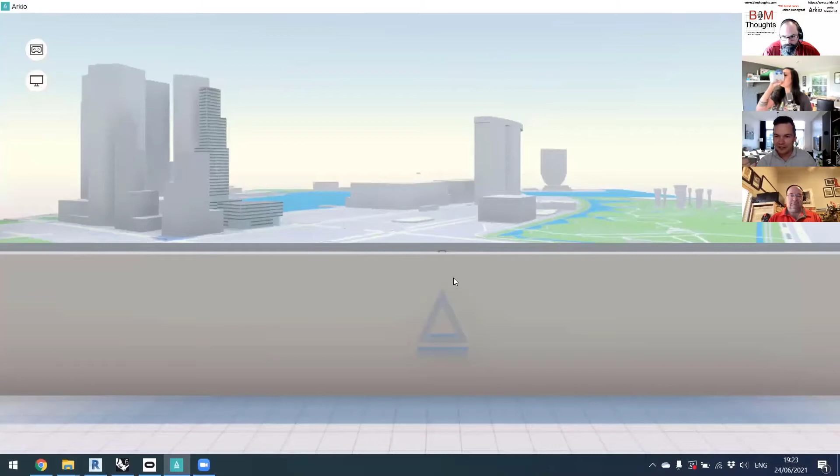Look at that, I can show a couple of things. We can also, I understood Carl, you got Arkio running on your end as well, right? I do have it, I don't know that I have it set up right now, but I do have it. Do I need to get it ready? Maybe at a later point you can just join in and we can show the fun collaborative things you can do.

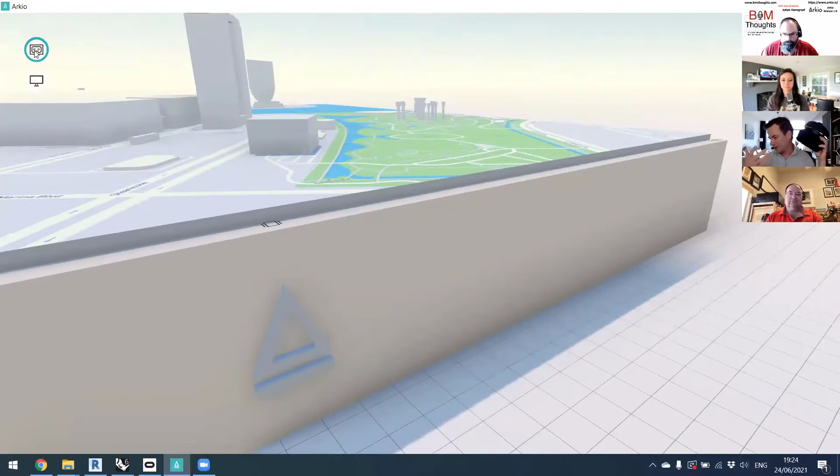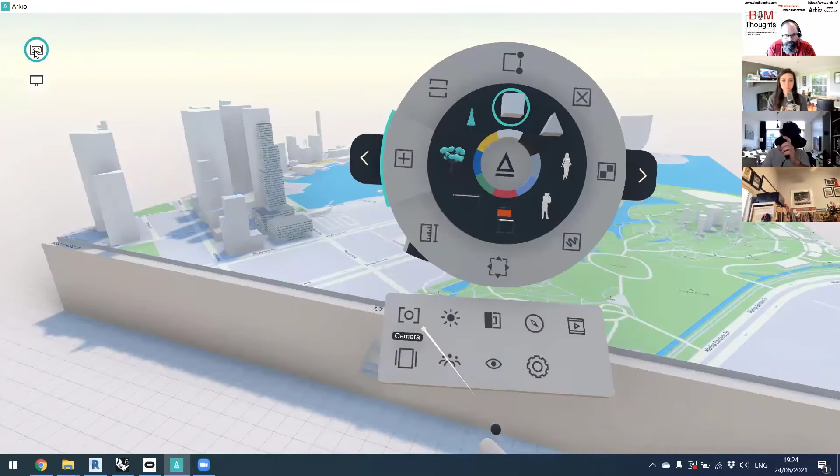The best way to show it is just going in there and showing you a bit how things work. So what you're seeing right here is the view I'm seeing in front of the table I'm standing at. I loaded a model of Singapore, but let me start from scratch, like I have here, a table where I can load any map. Let's go to the Empire State Building, for example.

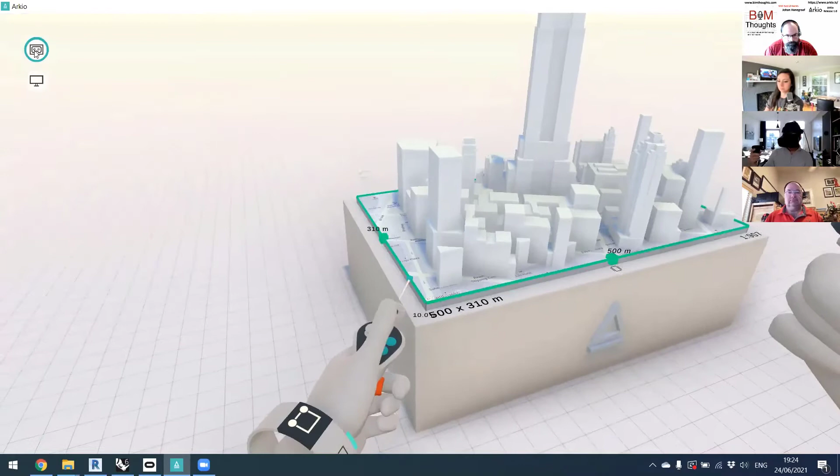And I turn on the 3D buildings. What that will do is take OpenStreetMap data, publicly accessible data, and we just load that on the table for users to work on. So that's the base that you start from.

You can load any address in the world as a city, and from there you would be able to—let's just bring up that menu again—erase some plots. Maybe there's going to be a new tower here, and in the erased plot I would be able to place some of the assets I have by default in Arkio, or some of the imported assets.

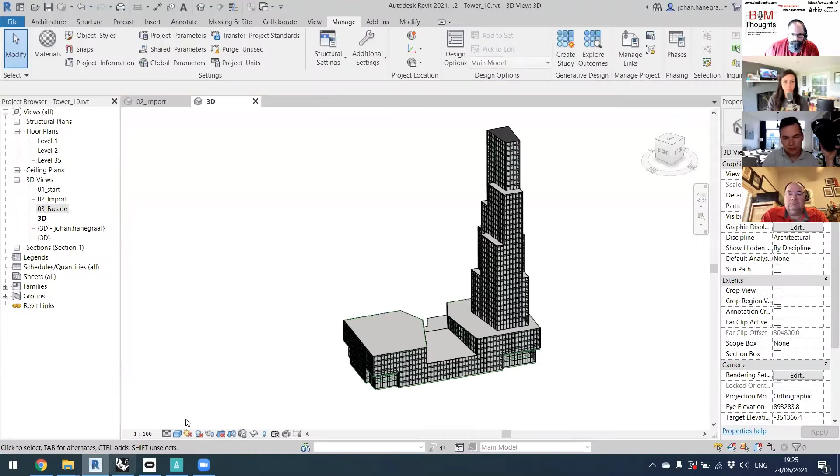The imported assets themselves, we have integrations with Autodesk Revit, Rhino, and SketchUp. It's pretty simple—after you install the Arkio version for Windows, you get these plugins in your software, and you can export the model from the 3D view you want. That will prepare the model for viewing on mobile devices, like the Oculus Quest, this portable headset, or iPads, or your Android phone, reducing the geometry so it can be loaded on smaller devices. It will load it to Arkio, and that will show in that import drawer I just showed.

So in here, I already have some models loaded. You see, I have a Rhino model over here, and currently my Tower 10 is updating again because I re-exported that one. Let's see, I have a twisty tower here—a Rhino twisty tower. I'm just going to put that thing in here. It's basically like a physical modeler. Once you bring things into Arkio, it becomes an object you can just pick up and interact with.

And the best part is that when you're making new geometry, you can draw on top of that model, and the geometry you make natively in Arkio is parametric and really easy to use and adjust using your hands. You see it's almost like the push-pull functionality in the massing tools in Revit or in FormIt. That makes it super easy for designers to just mass out some quick ideas.

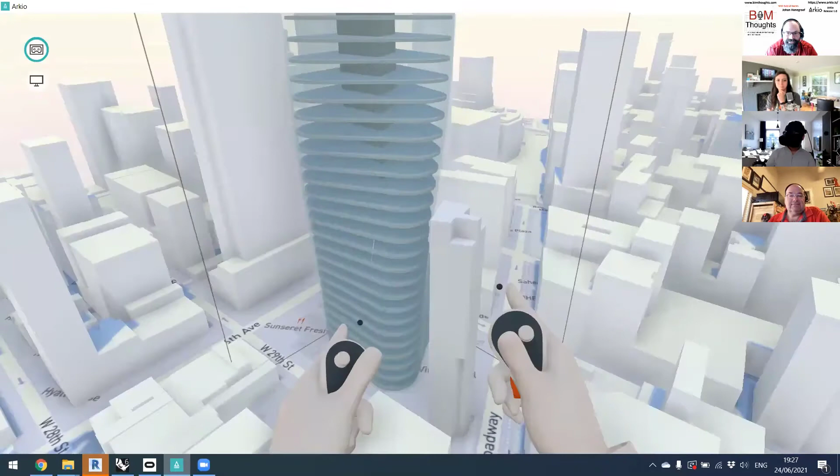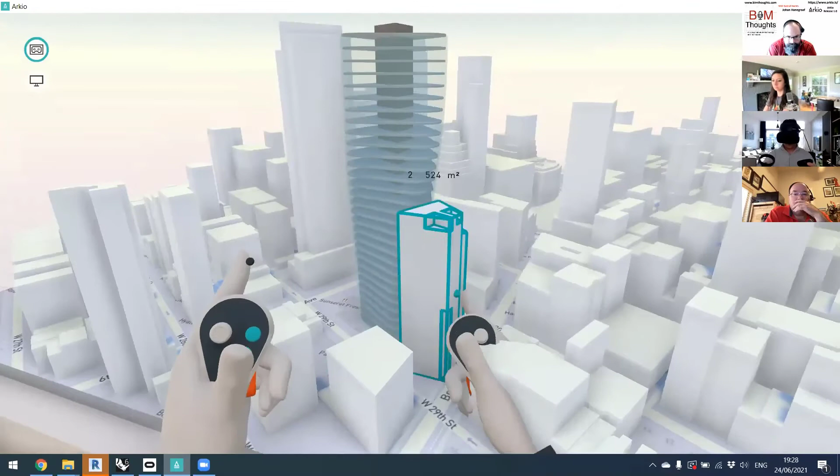Yep, and I'm just shaping something now using my hands and aligning it. The best part of VR is that I'm really seeing the model as it is—I'm at 1 to 500 scale. This is really the physical model in front of me right now, and I can interact with that model at this scale, or I can jump into the street at the 1-to-1 scale and see that model and adjust it from there as well.

The geometry created in Arkio, our smart geometry as I can call it, is fully adjustable, and I can keep editing it from this scale as well. You see me just stretching the tower down a bit, moving it like this, and I can jump back up and make further edits to the design like this.

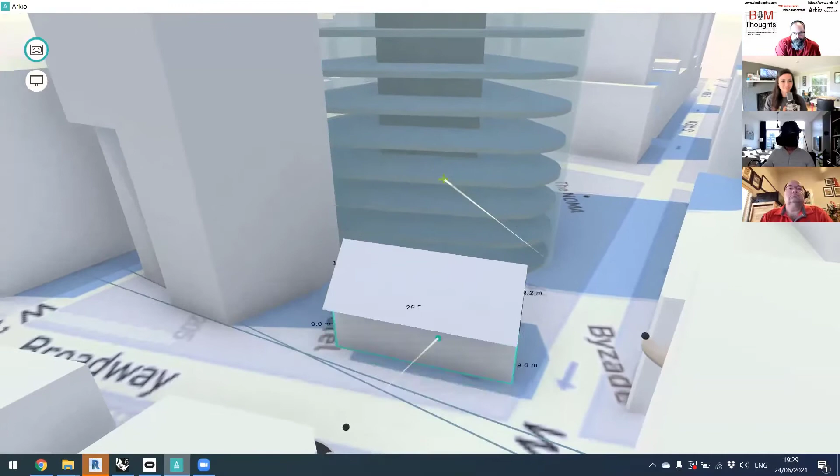Maybe I want to get rid of that one, just throw it away. There's a lot of things we put in there that are familiar with 3D parametric tools like Revit. So if you're familiar with Revit, you already see what's happening when you're stretching things together—you feel that they're snapping together, and once they snap together, it's making a parametric constraint. Currently this house isn't giving me the result I want, but let's make a cleaner scene so you guys can see.

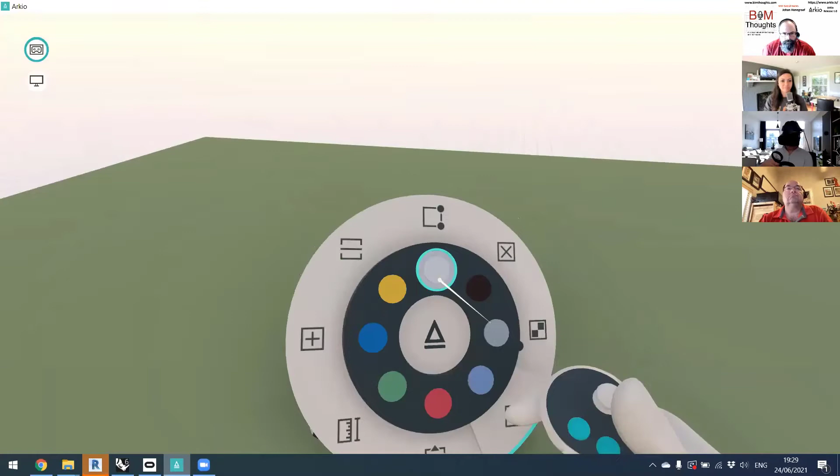So this is just an empty table. I'll just make a tiny house like this.

It literally looks like you're working at 10 speed. He's so speedy. It's amazing to watch. Yeah. Well, and it's funny as you're saying that—for those of you listening to the podcast, you definitely have to watch the video.

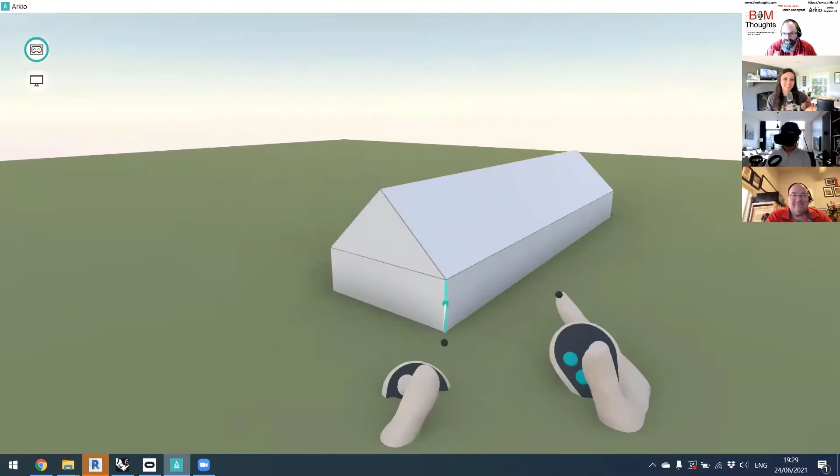But when you watch designers that have been using SketchUp for years, this is kind of how they iterate. But he's able to do that same speed, same time, live here inside of VR.

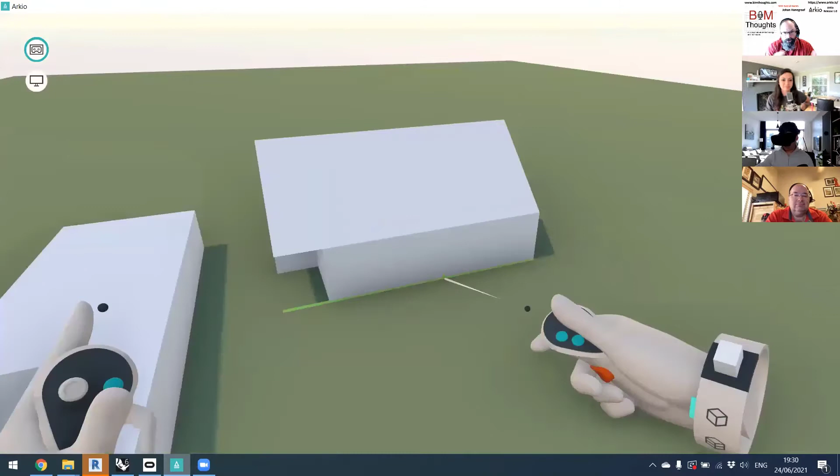For me, the earth-shattering thing was when he was walking through the demonstration in downtown Singapore, New York, or wherever he was, doing it in 1-to-500 scale, then instantly going down to real 1-to-1 scale and looking up at this 60-story tower, making adjustments, then going back to scale. That really would be a game changer for being able to do it right, because it looks like it's going to leave a shadow, it looks like it might do this, but when you're standing there looking up 60 stories, it definitely gives you a different perspective.

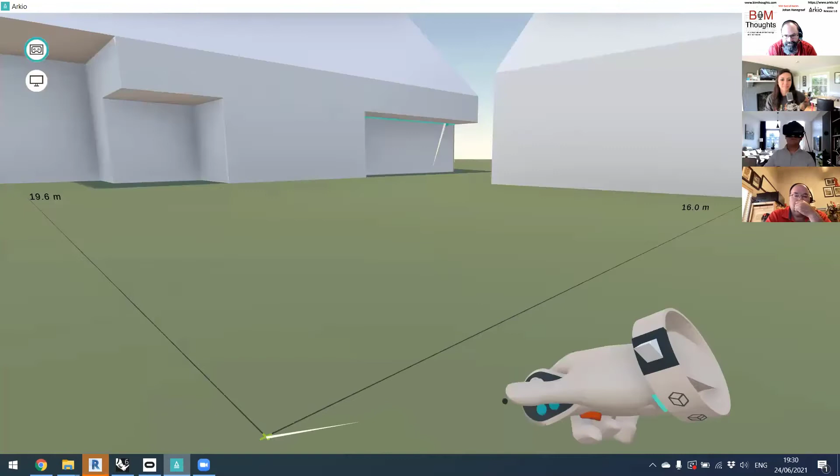And the fact that you could do that instantly is literally mind blowing. In the case of towers, of course, that's pretty impressive, but just small things like this, where you can see the see-throughs in your urban environments and make adjustments to that, that entrance that you want to have, or work even on inside spaces.

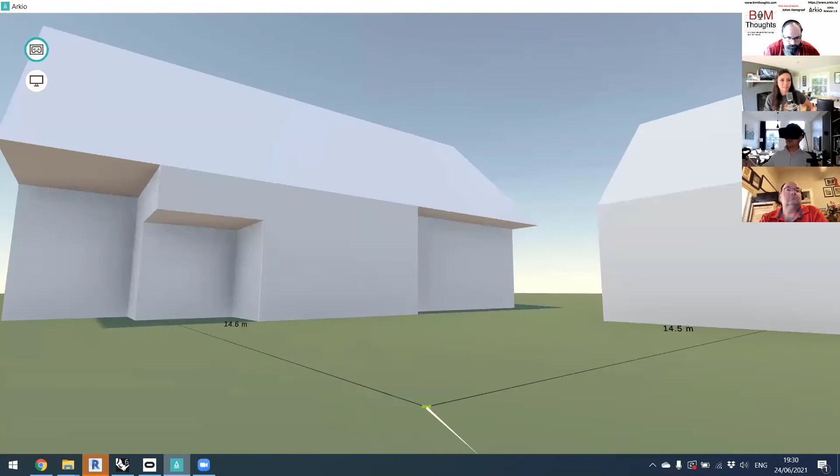There's a couple of models that I can show that really highlight how VR is really helping you to make better decisions than you would on the flat screen when you're working on designs.

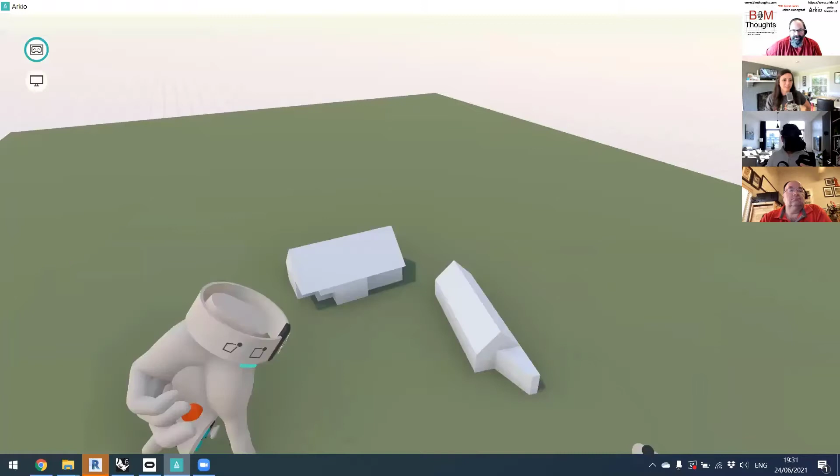The best and funnest thing is actually just inviting you to join me, Carl. I don't know if you're already ready to do that. I've loaded up the Windows app, I've got it here. I haven't got the headset on yet, but I've got the app loaded up in Windows.

So I will just go back to New York, and I'll just clear out a bit more buildings over here. Let's just maybe get away these. I hope that was no one's house that's watching. Me too. Well, they might be excited because they'll get a new house. Yeah, maybe a new house.

So, if people are watching, so far you've been seeing what I'm doing with my hands using the virtual reality goggles, but the flat version that Carl is seeing is actually looking like this. So we have the VR version of Arkio and the flat version, and the flat version is similar to the VR version. You can do pretty much the same thing, you can import geometry, you can place things around. You can even see my little head floating around here.

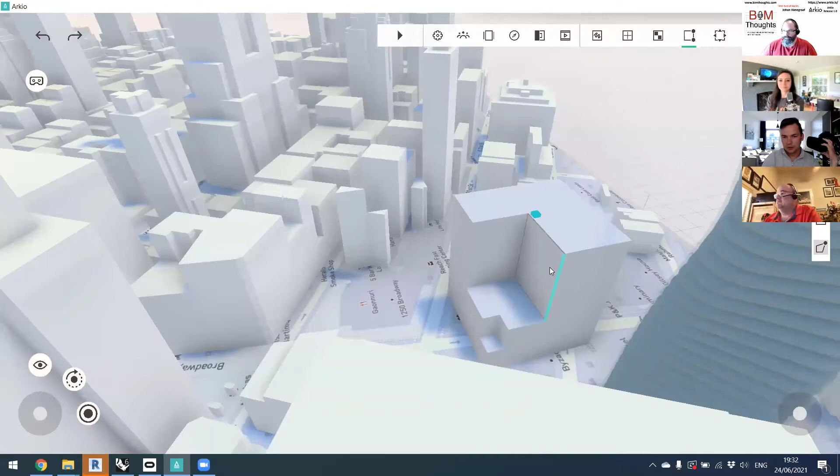Let me just show you some of those things. So when I'm creating things, I just press my right mouse button to finalize the shape. I just push the shape inside the other shape to make the voids. And also that geometry, I can just edit, I can distort the geometry if I want to. So the shaping functionality works the same in the flat version as the VR version.

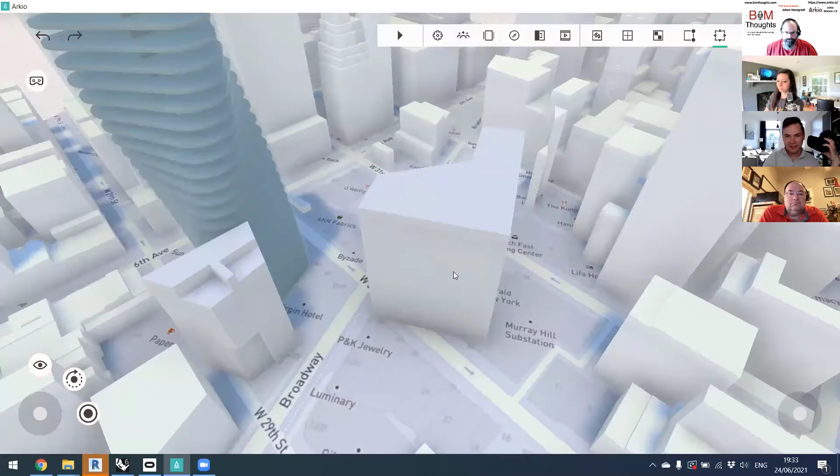But of course, the VR version is a lot easier to just pick up, rotate, and scale, like one single movement to do all these interactions using your hand gestures. In the flat version, you'd be a bit more limited, the flat tools are more limited.

It's connecting now. Are you going to the Arkio demo? Yeah, it's connecting. Okay, great. Then let me quickly go, because you might have been the first one. Yes, you're the first one. So then I will now mute myself here because we don't need to hear the audio. Since you were the first one, we assumed you are the host, the first one making the meeting. Oh, so that's why it's different, gotcha. And I will just make myself the host now, just okay, make a little start.

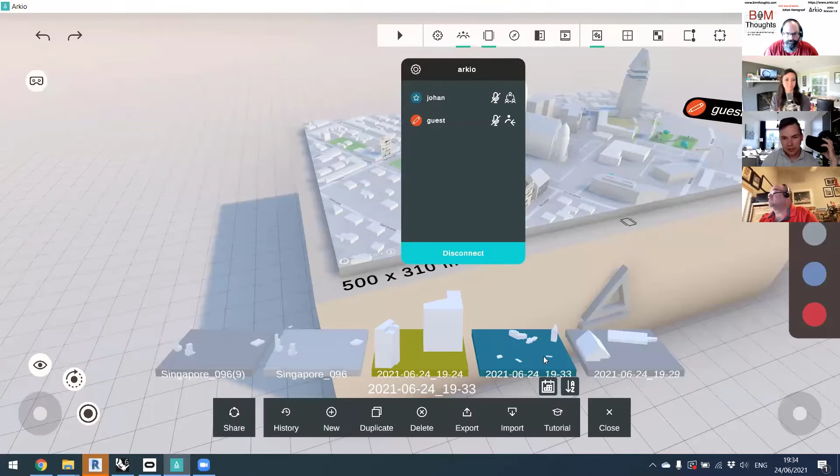And then I can share that model that I was working on before. So we have, I think, this one, I'll just share that in the meeting with you. So you should see New York City now with that little twisted tower that we saw before. I do, and I see your little blue head floating in the sky. Yes, there it is, it's not that little, it's a pretty big head. Well, actually, yes, true.

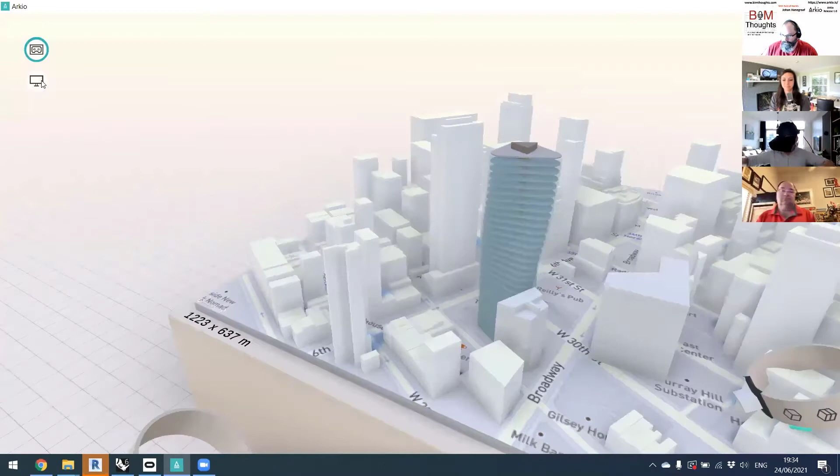Since we're now in this session together, you can see real time what I'm going to do. And we could do this with all four of us, even if Dana and Bill want to join.

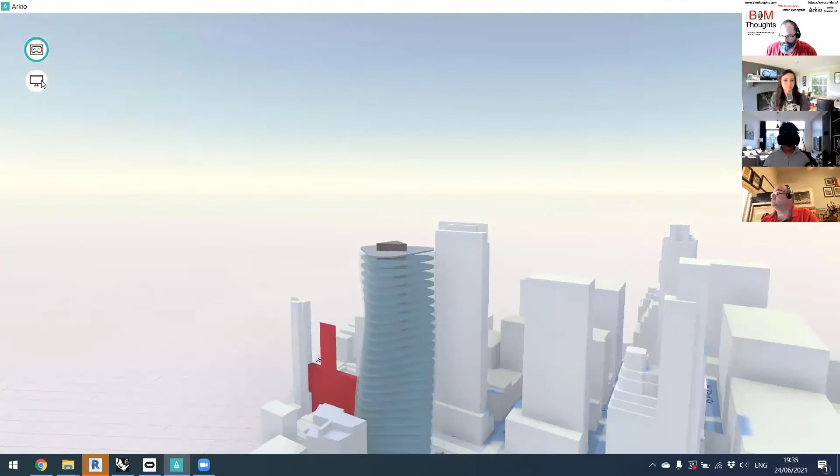And for those seeing that really weird skinny red building, that's me live. Yes, that's you, that's Carl. I see the sketch over here. That was my little scribble. Yeah, delete it, and I will.

We can make a suggestion on the Empire State Building to put it over here. Maybe you want to make a hole in here, I don't know if you want to do that. Empire State Building is too cool. Maybe you just add a bit of an extension here.

Look how he interpreted Carl's sketch perfectly. You mean the guest account? Right, he took that scribble Carl made, interpreted it perfectly, and put an expansion on.

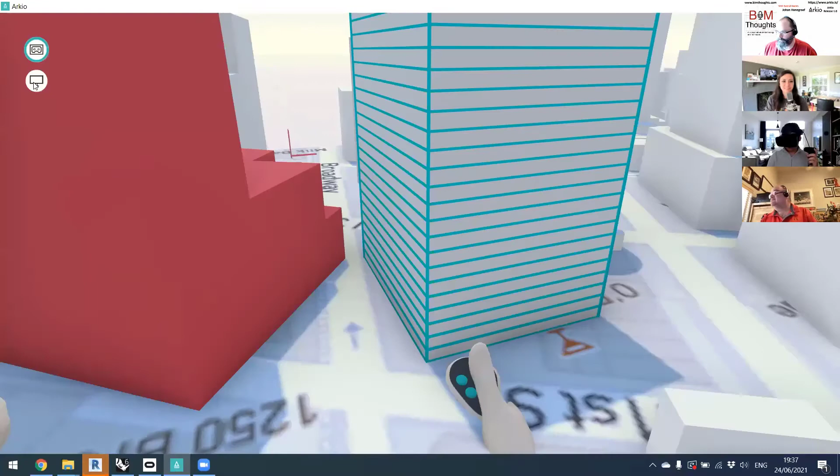I don't know if you've ever seen an architect model buildings using physical foam blocks. It feels a bit like that, the speed and intuitive direct feedback you get when you're foam blocking. But it's a lot smarter because you're working with parametric shapes that you can just copy around, and you don't have to go back to the foam cutter and make another version.

And what I'm doing here, I was using the split mode, and this shows that the building gets automatically cut into segmented floors. And here I can add some data to that tower, so we can show a bit the parametrics that are going on in Arkio. So this is not just a mesh editing tool.

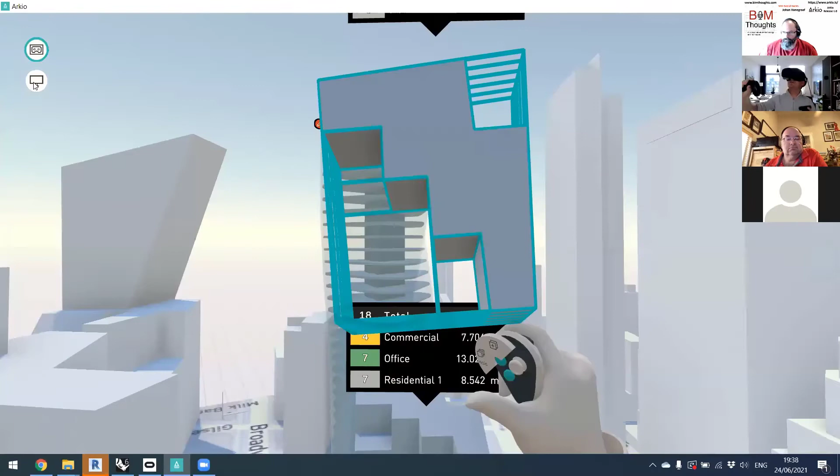SketchUp, for example, is famous for not making such BIM compatible models. This is actual solid geometry that's fully quantifiable, so we can do these calculations in real time. And when I really grab the building like this, you see how it automatically calculates the spaces that can be used. In this case, I could put it like this - it's a minus because there's so many voids in here that it doesn't work anymore.

But in real time, it's calculating the usable floor space based on my projected area down. And when I just stack these things together, you see how it joins everything into smart sections and calculates and quantifies everything in real time.

And you should see those numbers change as well on your end, Carl. I do, I'm watching it on two screens. I've seen what you're doing, yeah. So I'm seeing it from your perspective, but then I'm seeing it live with this big blue head floating around, doing things inside. So it's very cool.

And I guess this leads to the next question with you saying that it's solids. We saw how easy it was to bring content from Revit into the Arkio environment. What about in reverse? As we're walking through and modeling this, getting this basic shape, can we then bring it into Revit to refine it for our working drawings?

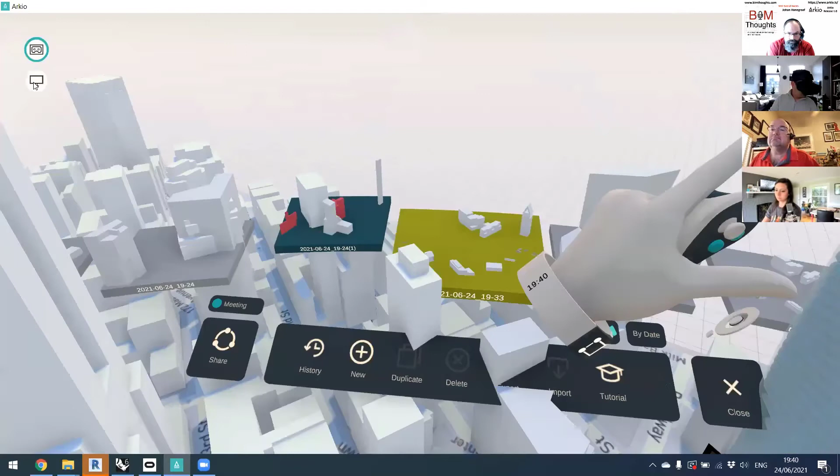Yeah, let me just show you an example. I have that scene that I was in when it started. It was like a Singapore scene, this one. I'll just share that one.

It should load in a minute for your device now, since it's already loaded for me. Okay, this tower is probably still loading for you. Yeah, I got an update notification here because I just exported the model from Revit again.

I didn't really change anything over the tower, but I'm just going to update it. So when there's a new Revit model or Rhino model available, it just gives me an update notification. This tower got created in Arkio.

It's actually designed pretty easily, let me show you. You just make some solids. I created these towers basically like this, cutting some voids, and then I was distorting things a bit. So this is how I created that shape.

I loaded that into Revit and applied curtain walls to the masses that came in. I can do the same steps now, like we already placed some custom furniture over here, a Barcelona chair and a little table with some tiny models and a person, and all of that geometry got placed and modeled.

So let me just put a tree on here and a sketch. Maybe there's a person with an iPad making a note on this model, or maybe you have some notes you want on this for the Revit model. Maybe you just want to cut this building a bit like that.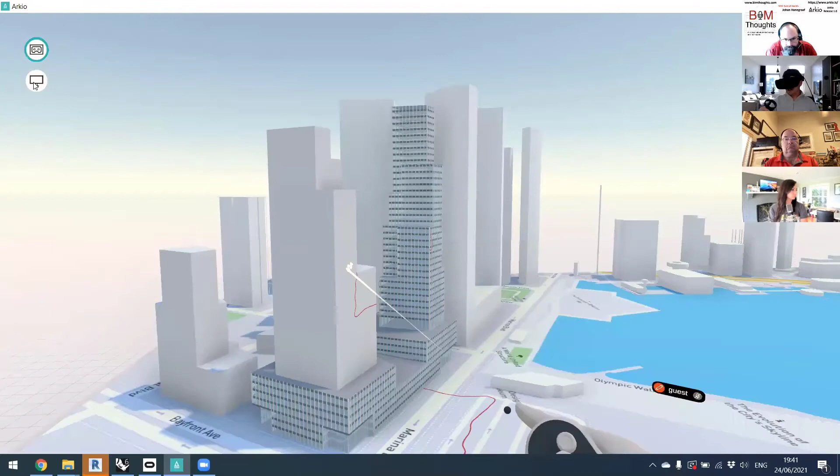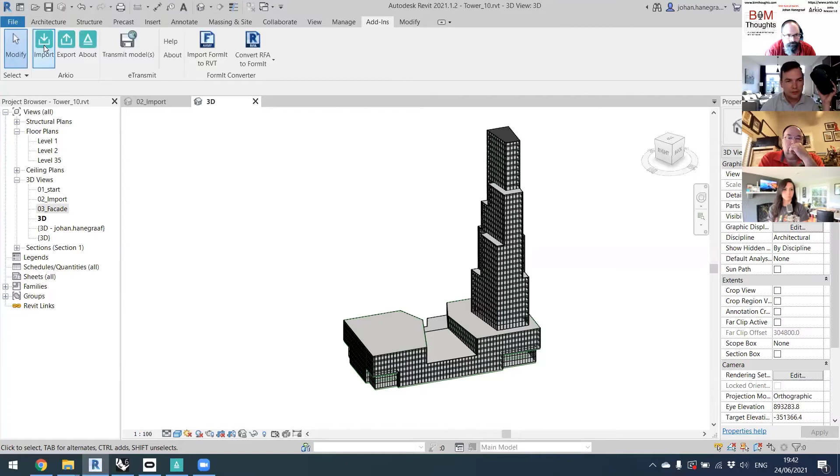So this scene, if I'm exporting that, I can just use the export button, export to the Revit file. This will put a file in my documents that can then be used in Revit to import. So let's go back to Revit, and here I can use the import feature. Let me go to another view first, because otherwise I don't see everything.

So going to just import that scene, and this is a manual process now. Every time I have a new update from Revit, I need to export, and I need to bring it into Revit by an import.

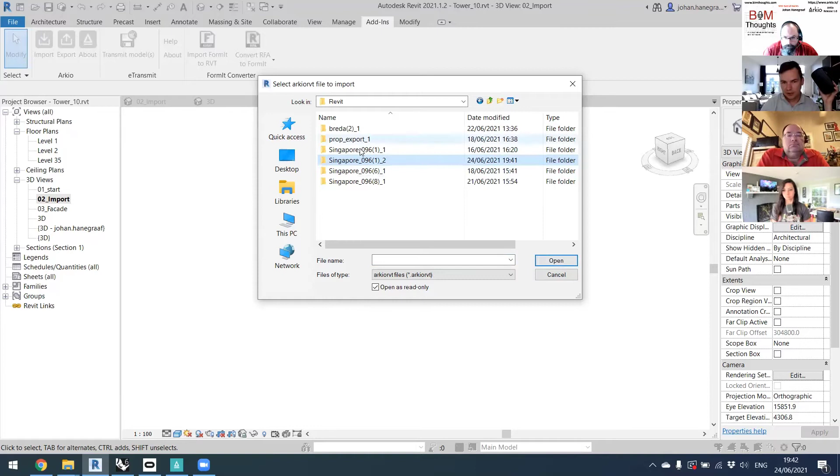What we're going to be working on next is making this even more like a live link, so users are able to really collaborate, like their Revit person is actually in there seeing the changes happening in Arkio live in the Revit model. Maybe make it like an inside app, like we saw with the Rhino stuff.

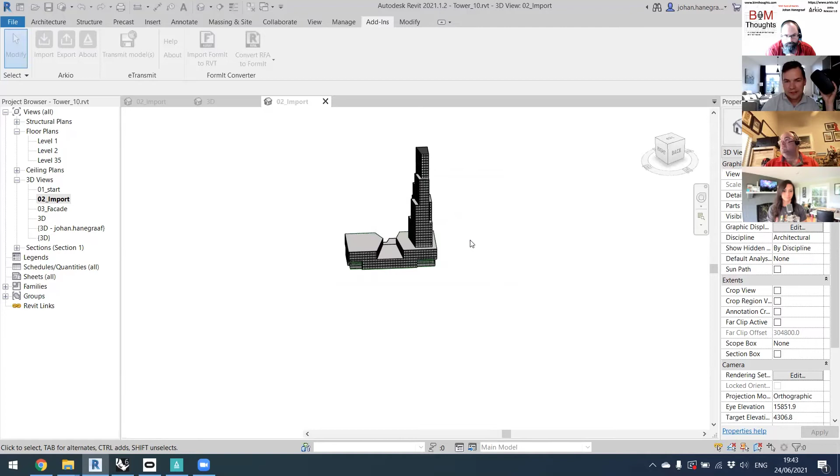So here, my UI is a bit weird on this PC, but it allows me to pick either generic models or masses. I'm just going to pick the masses, and if I had any previous Arkio stuff, I could replace it. This will take a minute or two, but in the meantime, maybe I'll show you some other Arkio stuff.

As that's loading, I saw when you were doing the export it was also OBJ, so you could create stuff here and export it for 3D printing. Yeah, we currently have Revit, Rhino, SketchUp, and BIM360 export, and an OBJ export. The OBJ export is the most generic 3D mesh format accepted in any 3D app ever, so that should give you the ability to 3D print, because the models should be pretty watertight since we're working with solid shapes.

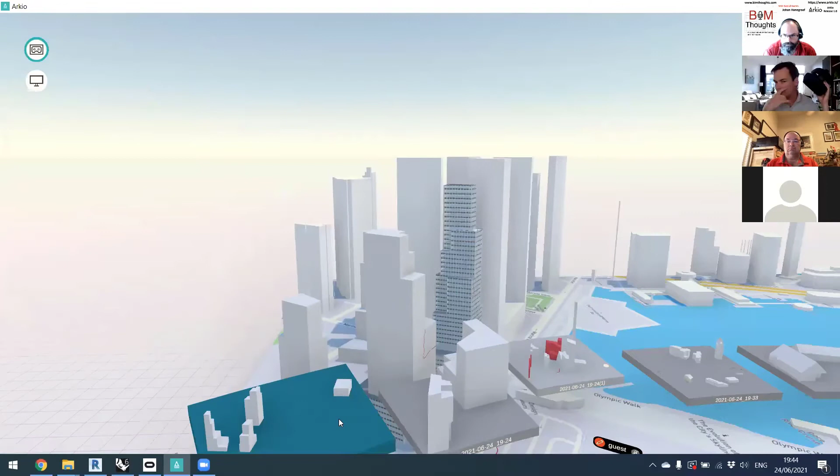And Rhino has its own benefits, of course, bringing it to Rhino for design validations. The BIM360 link we have is basically firing up a design automation client. It fires up Revit in the cloud, makes a new Revit file, loads all the Arkio geometry for you in a clean Revit file, and then you can download it from BIM360.

Plans for future IFC compatibility? It's definitely something we've been looking at, because it's a solid modeler, and the metadata that got assigned in Arkio actually lives on in BIM, in Revit. So it's definitely something we are looking into.

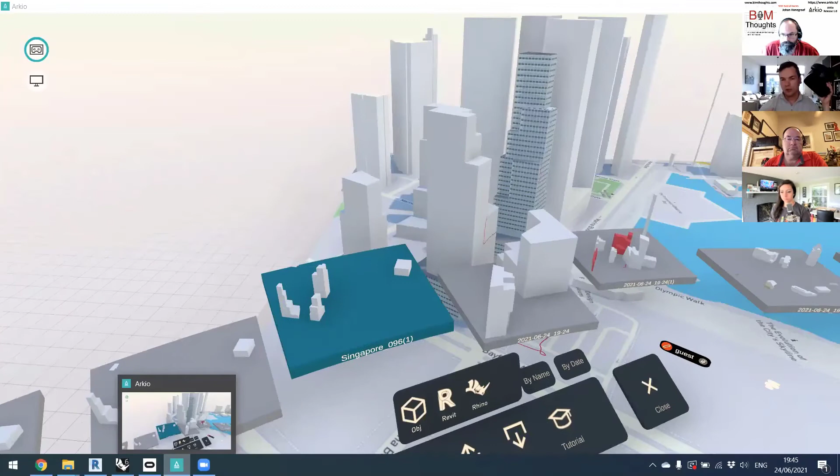But I think the focus first will be having the plugins for Revit and ArchiCAD work really good, so we work well with those applications and can add the real-time collaborative layer on top of the BIM collaborative layer for sure. At the moment those products, ArchiCAD, Revit, you can get IFC from them, so it's just an extra step, but it's nice to know it's on the roadmap.

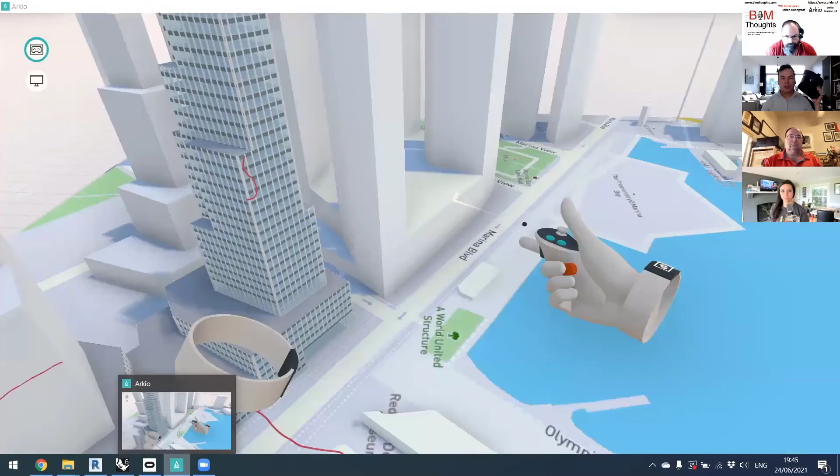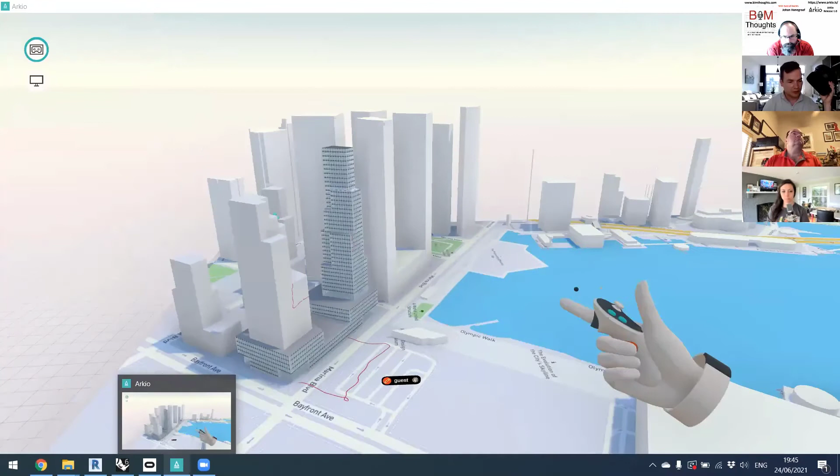We're really positioning it as, we don't want to call it BIM because it might scare off a lot of architects, they're really allergic to BIM. But it's really compatible with BIM, because you're not working with mesh geometry, you're working with smart parametric CAD kind of geometry that we're familiar with in the industry. That's also making it a pretty unique offering, because there aren't so many options for easy modeling with smart geometry in architecture.

Well, we also love to geek out a little bit about hardware here on the show.

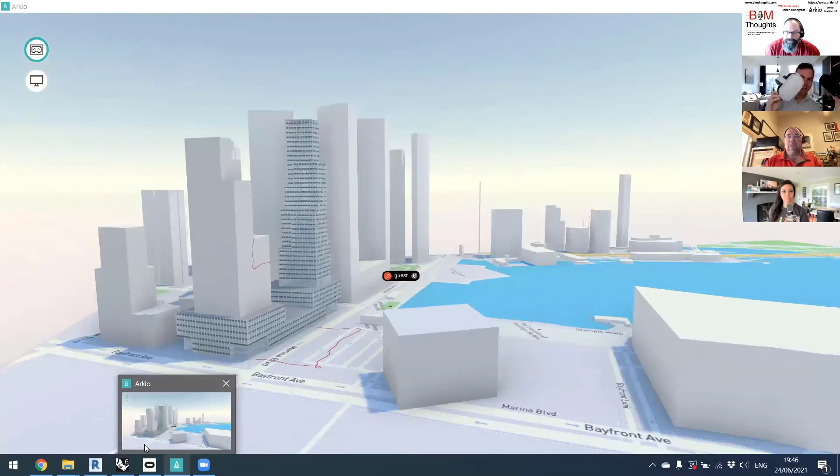So any preferred hardware, we see you're working with Oculus here in the video, but anything particular you work with? Vive, any of the other units or hardware that's recommended? I highly recommend the Oculus Quest 2, the one that I was just showing before. I don't know if people can see my webcam right now.

So this is the latest device from Oculus, acquired by Facebook. There's one major downside to it: you need to have a Facebook login, and it's because Facebook is heavily sponsoring these devices, so that's why they can offer them for $300. This is a fully standalone VR, even AR headset that has both controllers, 6 degrees of freedom, hand tracking, AR. So $300 price tag, you cannot beat that.

If you have a bit more money to spend, I would go for the Vive Focus 3 that just got released, because it has all the benefits of a wired VR headset, but it's completely standalone. You can run it standalone, or you can just stream PC apps to the wireless device, like the Oculus Quest 2. It also supports your PC doing all the heavy lifting, you can load the big Revit model in there, and it just streams the image to your wireless device.

Very cool. My Revit is not so responsive as I hoped today. It's Zoom and all this other stuff. So yeah, let's see what it's doing. It's still doing something, and it's a demo. Always a live demo is a risk, but I do have a backup file that I can show later if this one doesn't run directly.

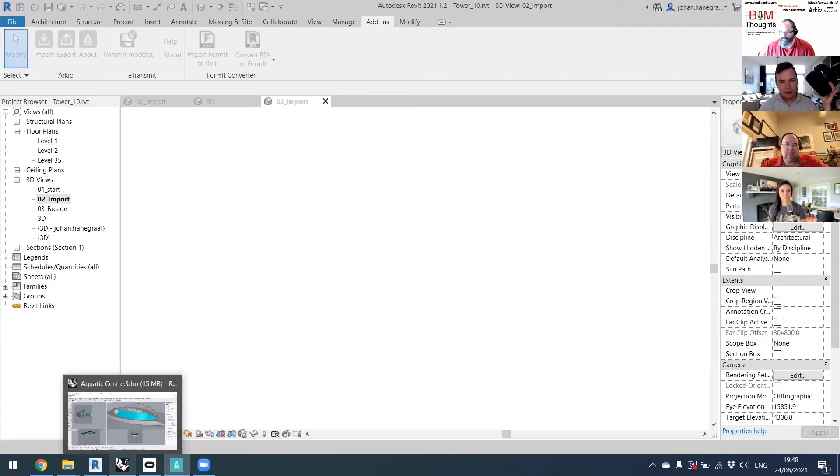But the geometry comes in as masses, and based on those masses, there's mass families. You can exchange the families into whatever families in the project. And the integrations that we have with Rhino are pretty similar. We just have the button exporting from Rhino and importing, and it does the same. It optimizes geometry because Rhino models are very nerdy and very heavy for mobile devices, so we optimize the geometry first so it can be loaded.

And when it comes back, we try to make the geometry smart, but this is still a bit work in progress for the Rhino part. We want to have native Rhino surfaces like we do with native mesh surfaces in Revit.

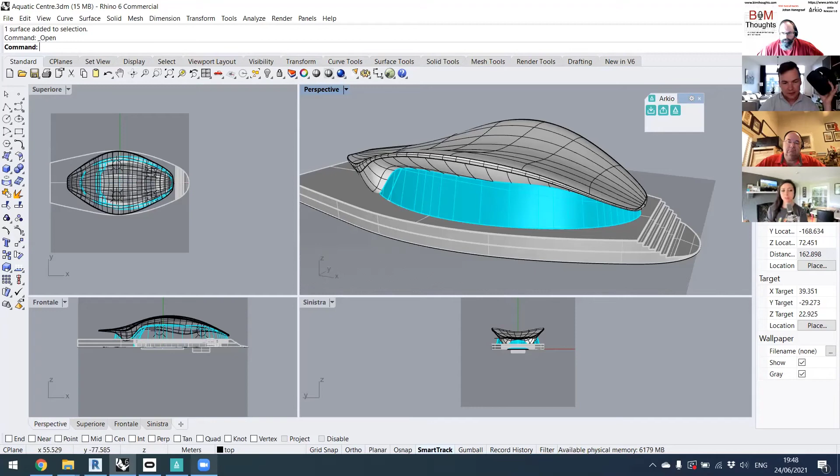And I really think that's revolutionary, right? I mean, I think it's one thing to have these design tools that allow you to push and pull and do all the wonderful things that you've been showing, super easy to do within this type of technology with Arkio. So what does tomorrow look like?

I mean, obviously, like I said, this is revolutionary, game changing for the industry. It's really game changing because it can shortcut a lot of the weird processes that we have in architecture right now. The fact that as an architect, because of the limited presentation space you have, you need to work on one option, or you work on 3 options that you present to your client on a 2D piece of paper.

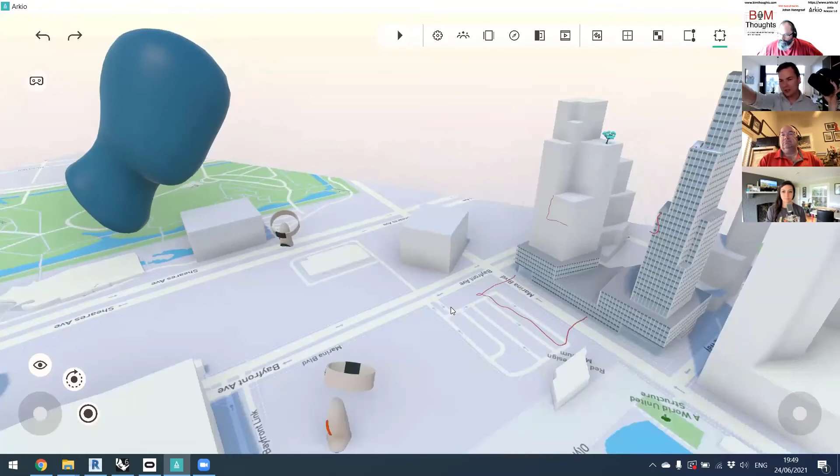Then someone goes with a marker on it, and in the end the drawings with all these markups get back to some poor guy or girl that has to change that Revit model or Rhino model again, has to make another 3 options. This can completely make that process interactive, and everyone can join it much easier. And you're working with 3D data, you're no longer forced to print that stuff on a 2D piece of paper to make the markups.

So what does that look like in terms of how we as an industry need to integrate this type of software? And then also, what does the software of tomorrow look like? I know that's an extremely loaded question because a lot of that is uncertain—we can only kind of guess at some of those things, but what's your hypothesis?

I think the software of tomorrow is going to hopefully be a lot more integrated and smart and playing well together, because I think we've all had the experience of fighting with the different silos that the different software companies put around themselves. So it's a bit hard. We are often punishing ourselves, and as an architect or engineer, just getting something from Rhino into Revit has been like a study on itself almost.

And the same is true for SketchUp. The same is true for all sorts of workflows that we try to figure out just to work together. And so far, the workflow that seems to work best is everyone just has to work in Revit. But that cannot be the answer, of course.

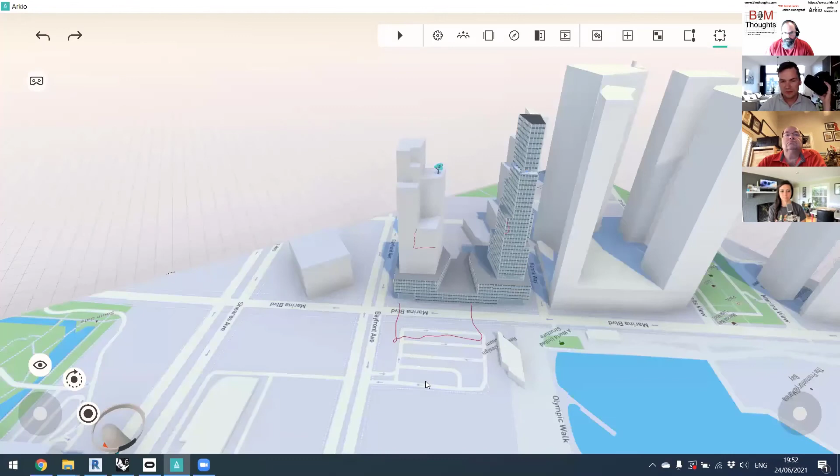There's a lot of people who aren't comfortable with a technical program like Revit. How are we going to enable those clients or designers to also join that digital, one model that we work towards? These tools will help get away a bit from paper and really focus on the geometry, and see how we can push that geometry back and forward into the different applications where you need it. I hope that answered the question.

Absolutely, yeah, totally. It's kind of an open-ended question, right? Because it's all kind of a guess. But I think the more we can educate the designers of today on how to catch up to the designers of tomorrow, or even the designers of today in a lot of ways.

A lot of what we're seeing in terms of people coming out of school, forward-thinking people like Johan - and it's not only me. There's a lot of young, new architects, a lot of interest from universities. I think the generation coming into the field now grew up with Minecraft, Fortnite, all this fully interactive, real-time stuff. They'll look at tools like Revit and think, what the hell is this? So that generation is more than ready to embrace things like this and start pushing it around in the firms.

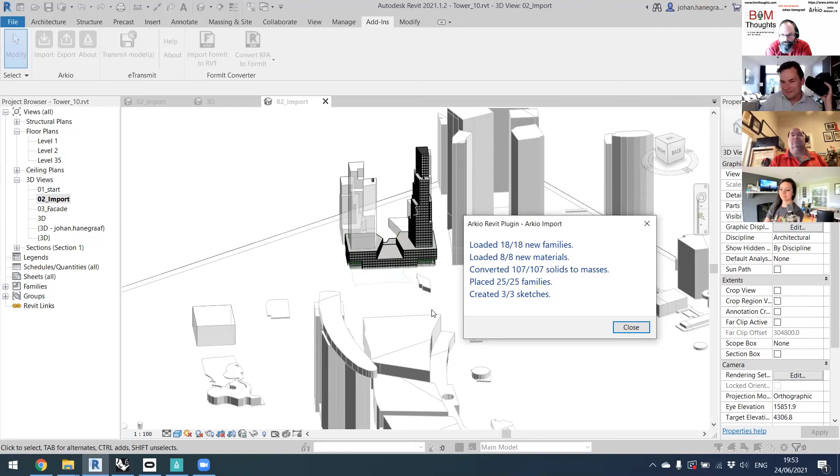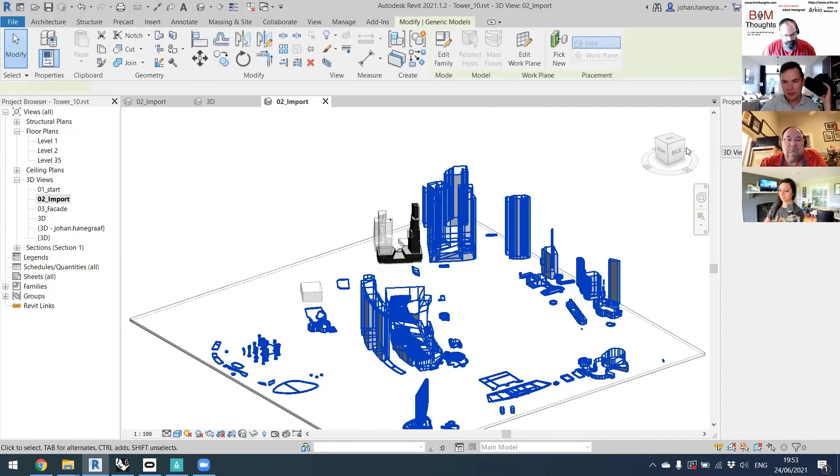In the meantime, you see the Revit model is loaded. We get a little overview of all the materials we put in, the solids, the convert, the sketches. That's loading the cityscape - the OpenStreetMap data from Singapore got loaded in Revit here as a family. You see that tower I just created with a little tree on top, and even that imported geometry - this is just an OBJ of a chair. We convert it into a family, and then you can change it for your own furniture families.

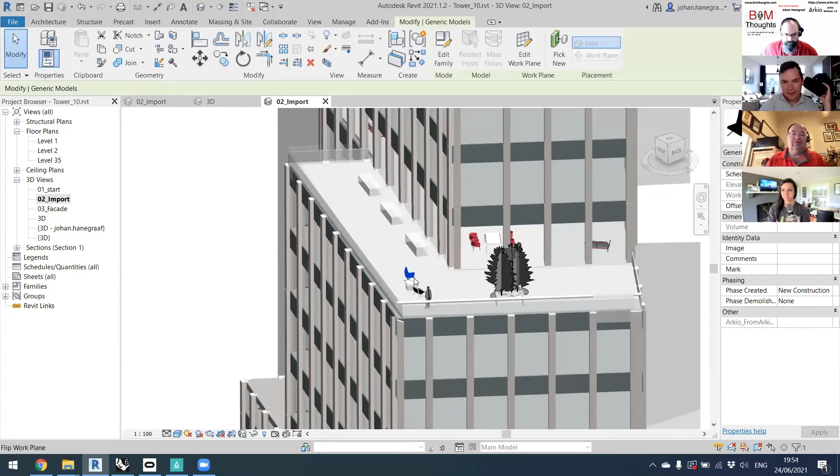That's great, and there's little Carl. Yes. Unfortunately, I think Carl was not exported. Oh, Carl didn't get exported. Yeah, only the geometry that got created, the sketches, got exported, not the avatars. I have to get an RPC made of Carl.

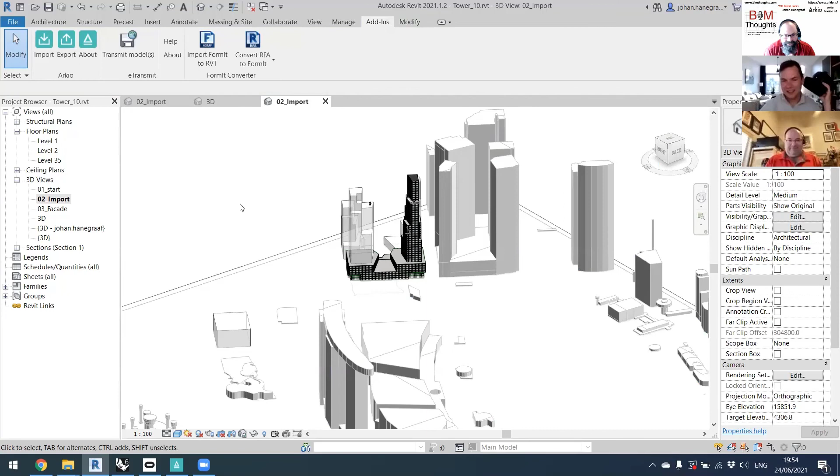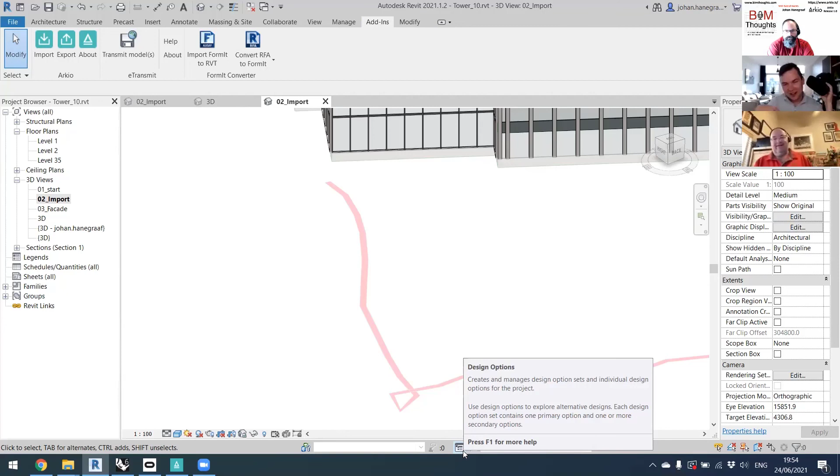There you go, just like our friend the polar bear - nay, the armadillo. I do like the fact the sketches came with it. It's interesting - when we first did this we thought it could be very useful, especially since we had more senior designers who love joining design sessions with their iPad and markup, red stuff and everything. It's been pretty interesting for them to get these markups back into Revit, and then they can just delete it, or make a floor in about that shape and delete it.

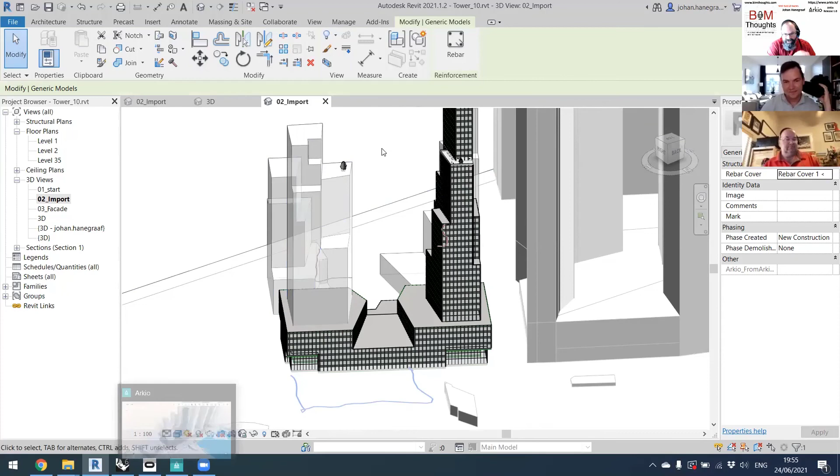Carl, I'm going to give you the honors of final thoughts today. Well, I appreciate that, Bill. I think for a 1.0 release, this is pretty impressive. I've watched the different iterations grow up throughout the last couple of years as you've gotten ready to bring this full-featured product to market, and it still blows my mind seeing what you guys are able to do. I'll reiterate for those watching that everything Johan did was live, real time, with me on the other side of the world on Zoom working with him in the platform. That just goes to show the speed and stability of the product. So by all means, check out Arkio.

Thank you very much, Johan, for joining us today. Yeah, thanks for inviting me. Really cool to see what you guys have accomplished - you should be proud of yourselves, it's very nice, good job. Thank you very much, I hope this is just the first version, so let's see where it goes. First version does a lot. Yes, I'm excited to see what the future brings. With the software and with the industry. I'm very much looking forward to that as well.